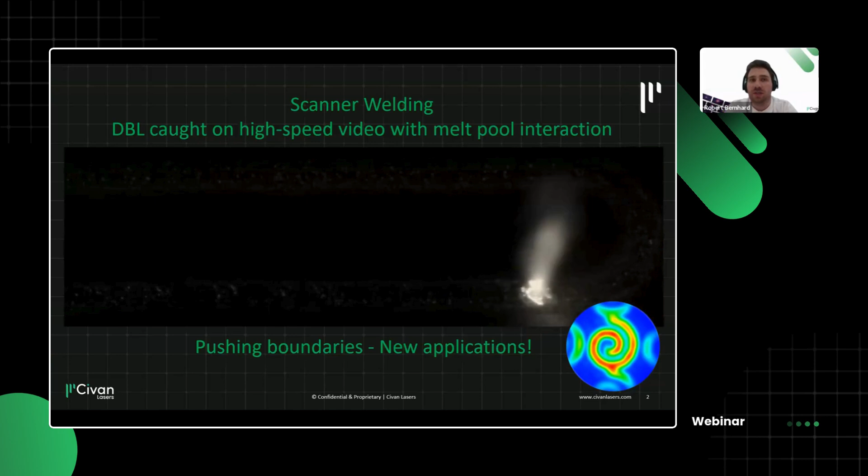The idea is we are pushing the boundaries of what's possible, meaning that we can now weld materials that are hard to weld or that we're not able to weld as of now using dynamic beam lasers. I just want to give an overview and some insights into what we are currently welding, and keep it open for discussion at the end about what else you can think of to weld.

Let's do a very basic technology fundamentals thing, because I think what you need to know about our lasers: if you buy one of our lasers, you get multiple lasers, and these do constructive and destructive interference, which means in the end you're getting multiple laser fibers that do interference patterns on the workpiece in the focus spot. This means at first we have really precise control of the beam caustic.

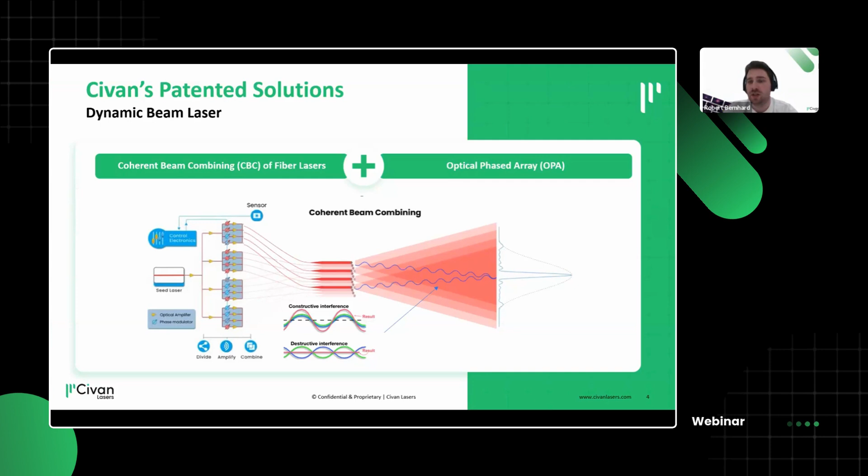But also, by using coherent beam combining and detuning some of these fibers, we are able to move this interference pattern around. This is key in order to be able to do high-speed modulation of the laser and then also of the beam shaping. So we are talking about dynamic beam shaping inside the focal area of our laser.

So this is nothing mechanical - it's purely electro-optic, and this means it's fast. Fast here, we are talking about megahertz of phase shifting, which results in frequencies above 1 megahertz where we can move around shapes.

We see that workpieces and metals, especially in welding, can really react to these different frequencies and the refresh rate of these shapes. If you think about it, when we go for conventional scanner welding, the upper limit is somewhat around 2 kilohertz. This is where we just start, and we would say this is something dynamic, where the process - the keyhole - follows the laser beam.

If we go higher in frequency, we go through a resonant regime, which is also really important for the process, because this is where we are able to get rid of impurities during the welding. This is something highly important to the welding in terms of frequencies. For aluminium and steel, these are usually 10 to almost 100 kilohertz, I would say.

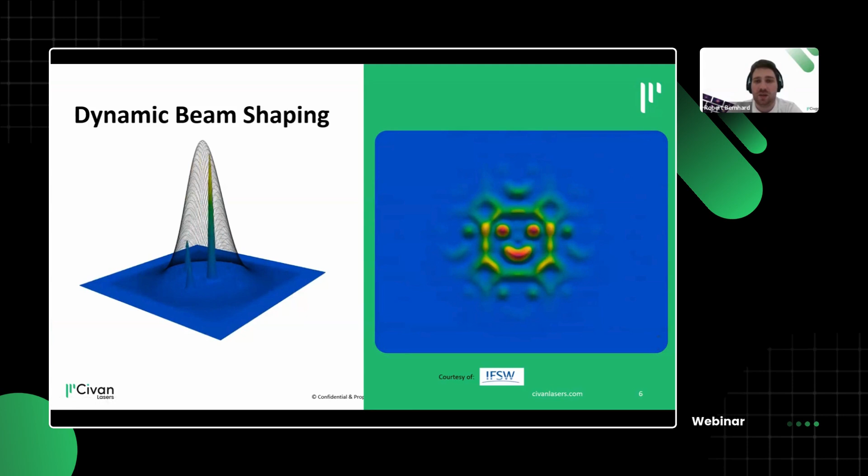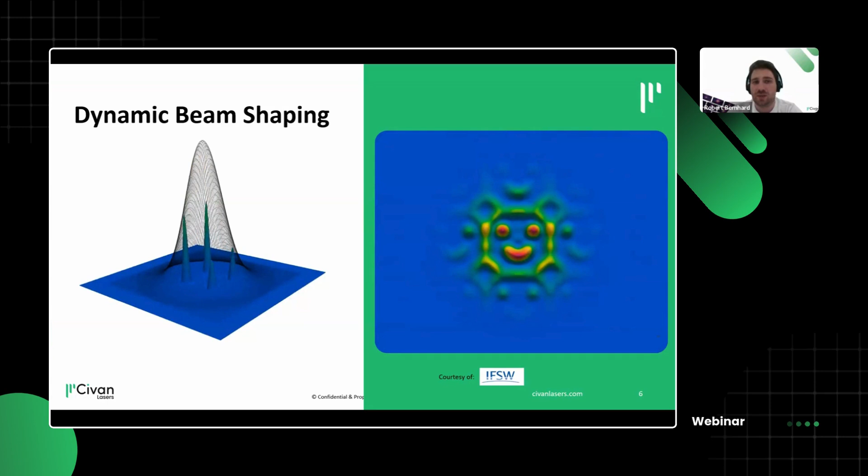This leads to megahertz speed of shape generation. In some fraction of a second, or even nanoseconds, we can trace out all the dots that make up an interference pattern, like this nice smiley here. So this is over time, but it's very important to know that the beam shaping itself is very dynamic, and we can control that dynamic aspect and tailor it to our process.

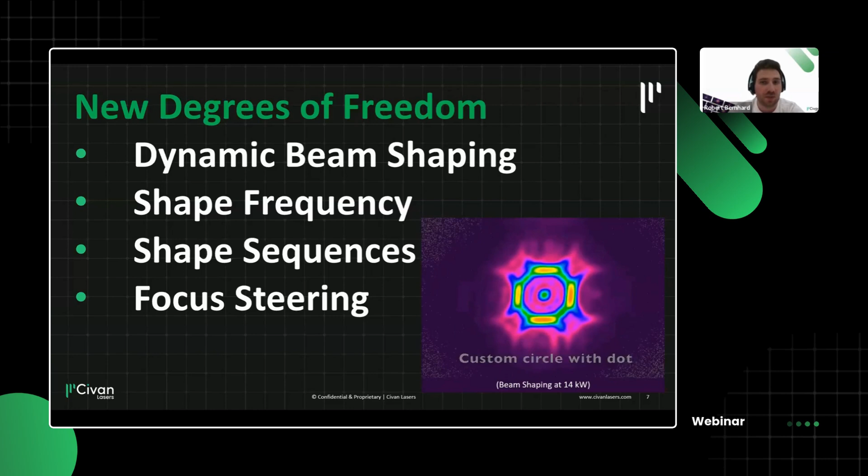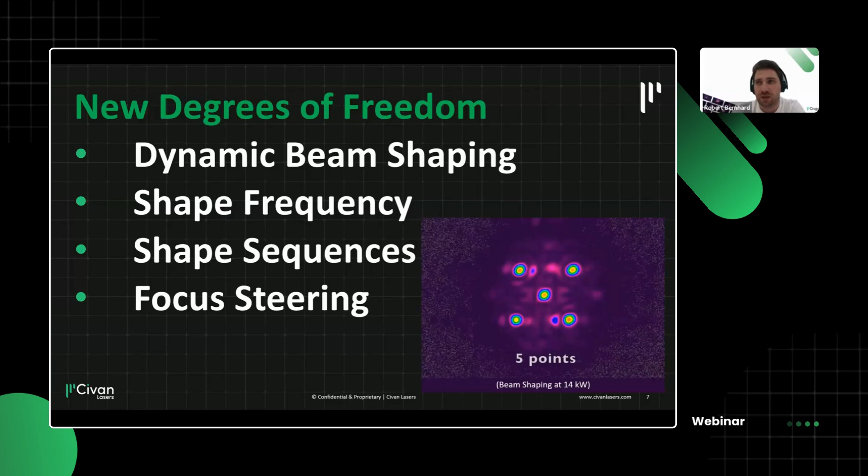By doing this, we have new degrees of freedom starting with the shape itself. We can design shapes, program them simply, but then we also have more parameters, like shape frequency and shape sequences, where different shapes follow one after another that can influence flow situations in melt pools and so on. And finally, this also enables, by clever focus or frequency shape shifting, a kind of focus steering, having an electro-optical Z-axis. These are the most important new degrees of freedom, and we put them into action.

Sequences can consist of 28 shapes each. As a starting point, I have a few combinations known for good parameters when we want deep penetration. We have something in our recipe book that works by having a confined beam, but then also some widening of the melt pool and so on. This works for many things, and it's really intuitive - I want a wider beam shape, but I still need some concentrated preheating, post-heating inside that laser beam. You can quickly get different kinds of sequences clicked together, and you're good to go.

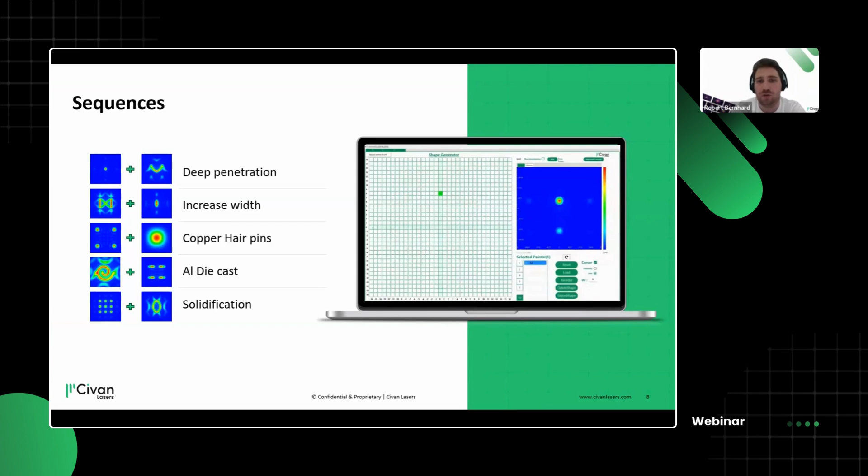This also leads to our programmable beam shaping, giving us the capability of rotating the beam shape without rotating our head. You may have seen it at the beginning in the intro video, but here on the right side it's more schematic and easier to understand - without turning the laser head, we can actually rotate a beam shape that here is 2 dots.

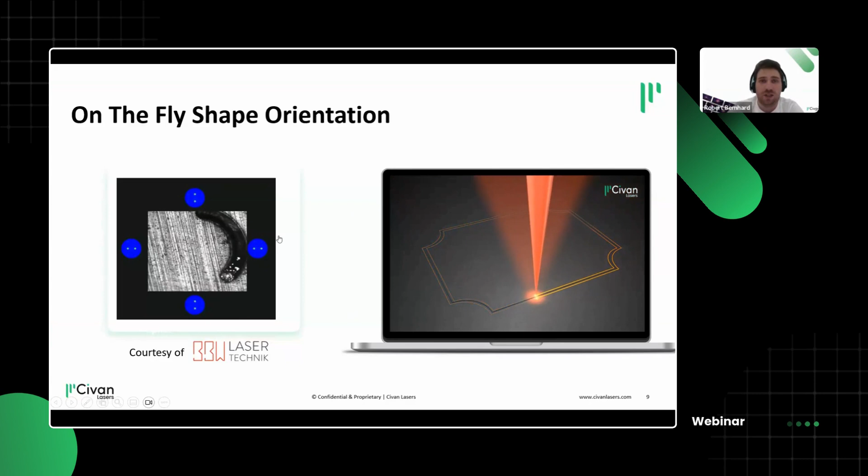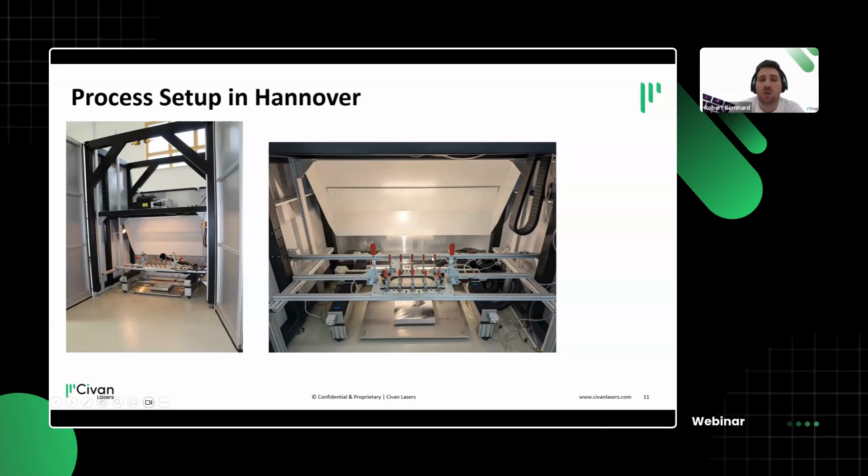Let's dive right into it. We've made some good progress with aluminum battery coolers in Hannover. Just to give you a feeling of what we're working with there, it's a really flexible setup where we have the laser head with the scanner up here, doing quite some remote welding. Down here your jig can be, in this case, a simple demonstrator jig for welding these cooler plates. You can see me putting one in here and then welding them remotely at high speeds.

The key aspect here - and I think I forgot to mention it - is that welding these coolers, which in e-mobility are usually big parts, 2 meters by 1.5 meters or so, with a lot of weld seam length on them. The challenge is to weld them leak-tight, but also really, really fast. Welding them fast is, of course, a challenge due to the material, in terms of getting the energy where we need it, as well as getting it crack-free.

When we're talking about high-speed welding, my definition here is 30 meters per minute, so 500 millimeters per second, and that's our target welding speed we wanted to achieve. As a starting point, we wanted to go with just a single dot, to make it somewhat comparable. But to spoil it a little bit, the single dot is no way of getting this welding done correctly.

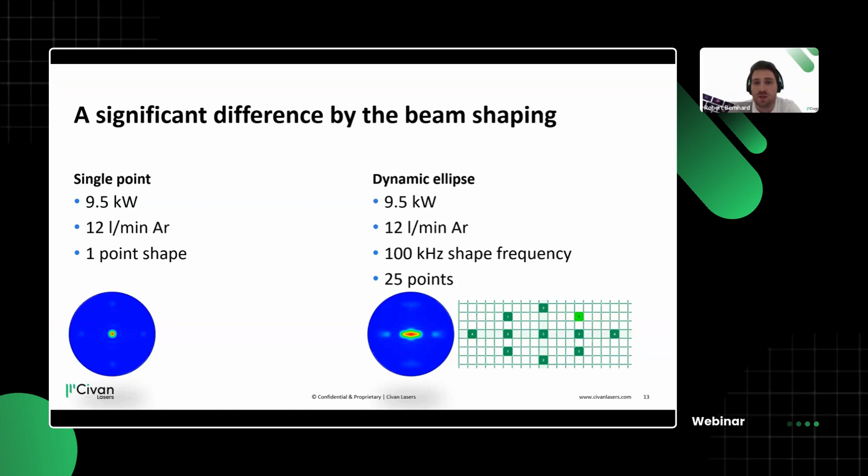So what we developed is a dynamic ellipse that has 100 kilohertz of shape refresh frequency and consists of 25 individual points. You can see how this is made up here in our program on the bottom, and it's important that our welding is aligned orthogonally to this line, so the leading edge is on top, and this makes for an especially wide weld seam. And of course, using the scanner rotates, like we saw with the 2 dots, it also rotates this ellipse electro-optically.

This means, like we were talking about, this is really, really fast. You can see the video speeding up. It's 100 kilohertz, so I can't show you, but what the workpiece here experiences is 100 kilohertz shape refresh frequency. That means every single dot is only on for 400 nanoseconds, and this enables us to get the stirring inside the material and open up the keyhole capillary, as well as getting the process on point in terms of still doing high speeds, but getting the solidification right and getting rid of cracks.

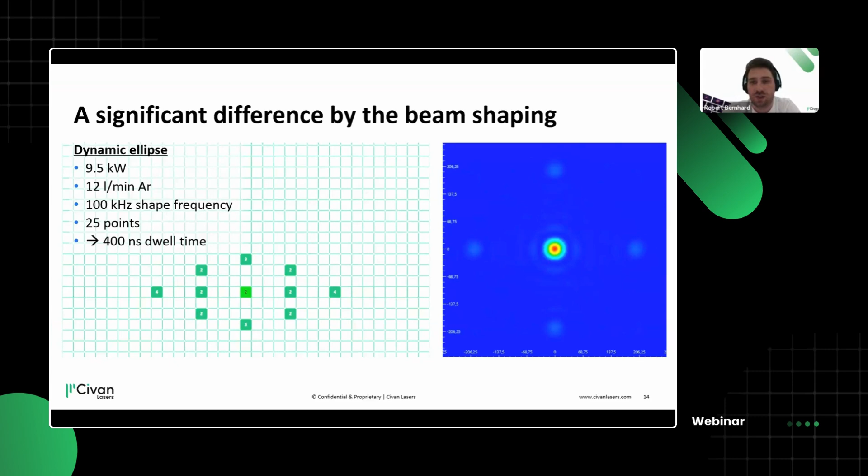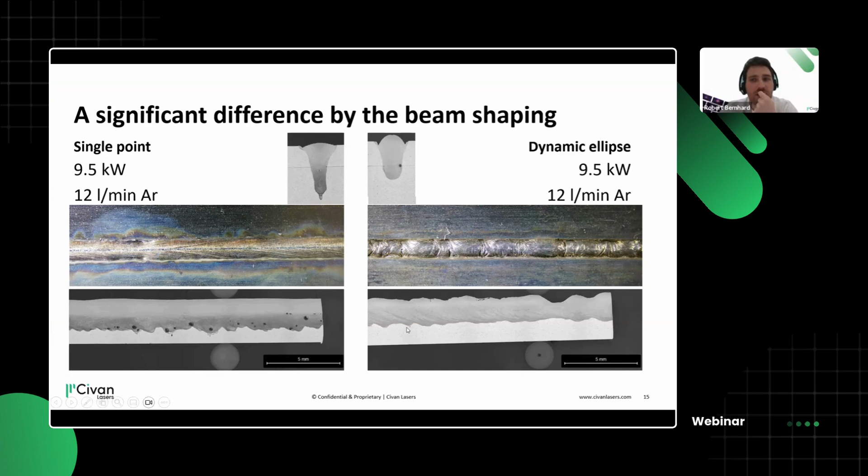What I mean by this, by using a single dot, we have, of course, deeper penetration. This is something we understand. But at the same time, we get a lot of imperfections. Looking at the cross section here, at these high speeds, we are still experiencing some fume issues, but no cracks, without any inclusions. So we are really happy that we can achieve these high speeds by doing this laser welding.

You can even see it here, I think better on other aluminium, where we can achieve also at a little lower feed rate, but getting very wide weld seams. So dynamic beam shaping here as well helps us get the weld seam tailored to our needs.

Talking about this cooler in specific, we are using this demonstrator here because it's a non-NDA one. We can openly talk about it.

So it's a dynamic ellipse, 500 millimeters per second. The top plate is 1 millimeter thick, the bottom plate is 2 millimeters thick. And we are able to achieve with this design leak tightness. We specified it as 2 bars, but I've seen the coolers bursting at 6 or 7. And then it's usually due to the design because we have inflation of these size.

There's, of course, some challenges to overcome at these high speeds. And I would argue that we can even widen the process window to get rid of undercuts. But in general, it's really important for us to have the leak tightness, and this is what we are able to achieve with this parameter set. I'm of the opinion that we can also do outside construction or structural welds as well, but the leak tightness here, the long welds we need, we are able to achieve at 500 millimeters per second.

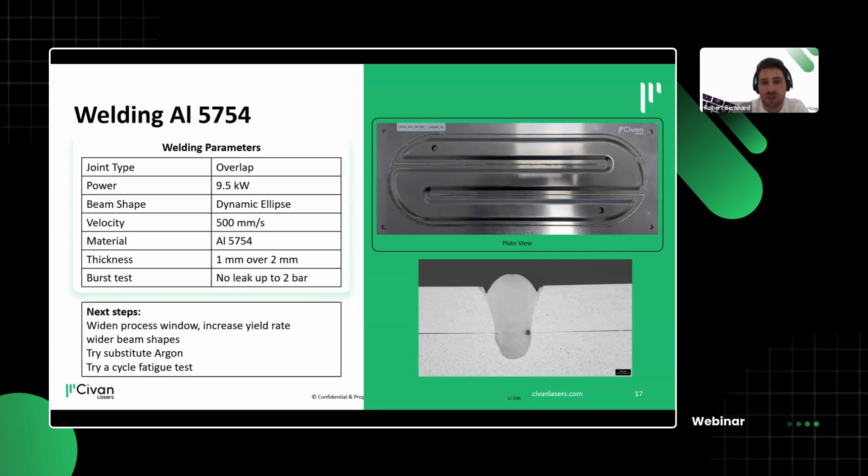Something I also like to show a lot is the difference between, or when you start to measure your laser process, there's pretty nice tech out there. In this case, we used a 4D sensor, but also the Precitec LWM works well. We've proven it, and the Plasmo process observer is also a very good option.

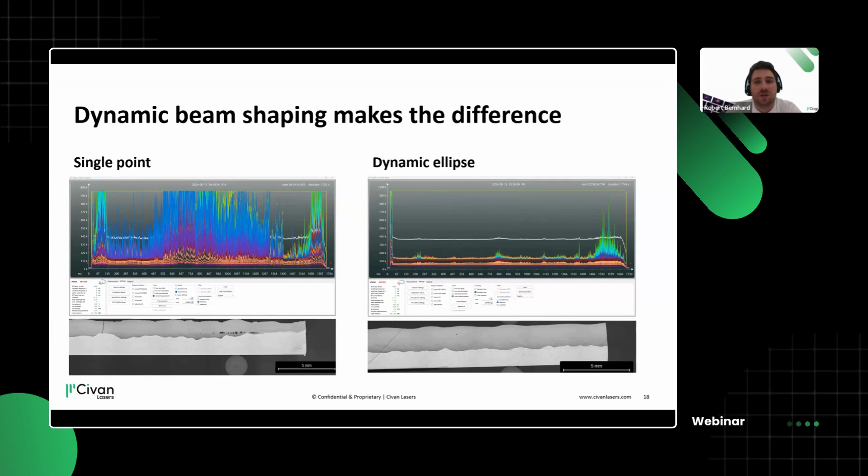What I find interesting is that, again, talking single point versus our dynamic ellipse, we get a lot of cracks during the welding, but also what we get is a lot of back scattering, which we attribute to the keyhole collapse that we can see during the welding. So the signal you see here is back reflection in different wavelengths from the process zone itself. And if we switch to our developed dynamic ellipse, it almost becomes good. This is something manageable where in series production we can specify a threshold and just see that this is a very stable and good process, I would argue.

So to underline this, for our Civan coolers demonstrator, we have this dynamic ellipse that has less penetration width or depth. The width is wider.

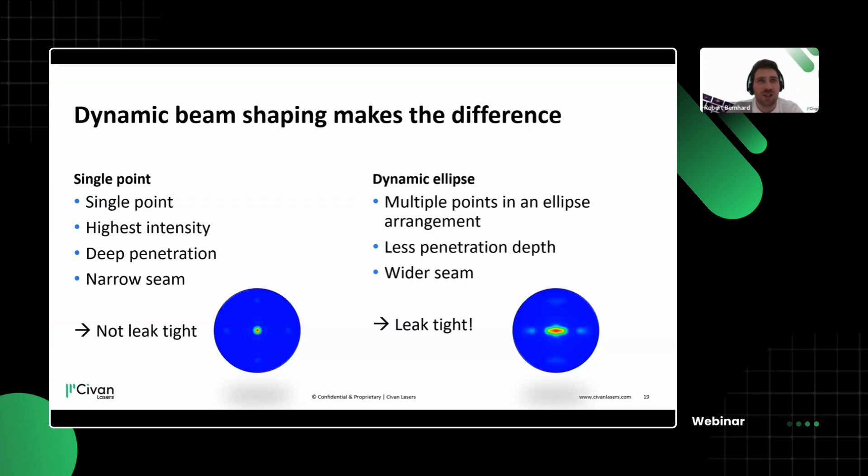And we get with this dynamic beam shape, following the path of the weld, leak tight coolers at 500 millimeters per second. This is something we weren't able to achieve before, and I think no one else was able to achieve this high speed without cracking, in other typical Gaussian configurations. This is also a nice thing about the scanner, where the process speed is not limited by any axis, and this is something we can do with our laser as well.

Stepping back a little from aluminium, but in the scope of e-mobility we are talking about, I think it's a must to mention copper. You already see the first results here with copper welding in terms of bus bar applications, talking about the welding of hairpins.

This is, I think, something where there's a lot of ideas using different wavelengths, blue and green. That is a decent approach, but I think nothing beats the high quality of our welding in infrared, high power, perfect beam quality, and stable keyhole.

And now by introducing dynamic sequencing, this means we can do fun things like melting the copper hairpin by placing 4 individual dots alongside, or even a line on each of these hairpins, and then switching to something more random. This means we have something steering and connecting them, so you get really this pearl being generated.

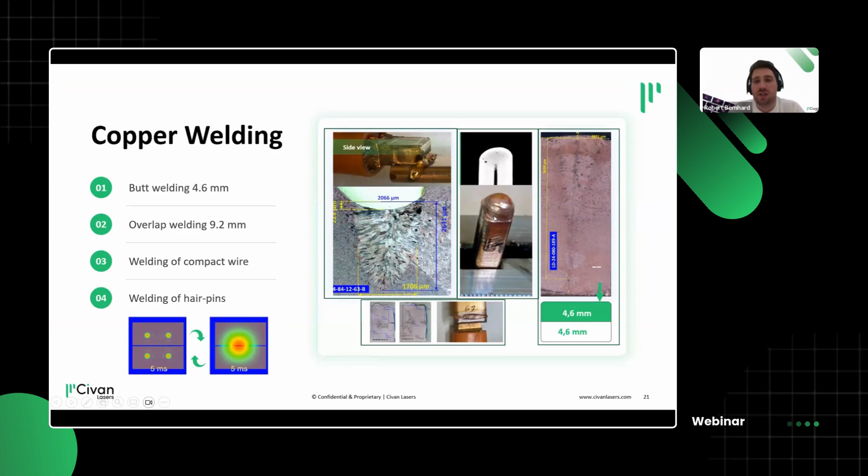So we see also in copper, I think this is something I published for the Lane conference just last year. Doing beam shaping allows you to get very good penetration, get rid of spatter, as well as making sure that the weld seam itself has the right dimensions.

How do we do that? For copper, we need high intensity to just get the process started. This is something we can do very well by doing constructive interference in a single point. So this is an interference point. You see it's really small, condensed, around 85 microns in diameter.

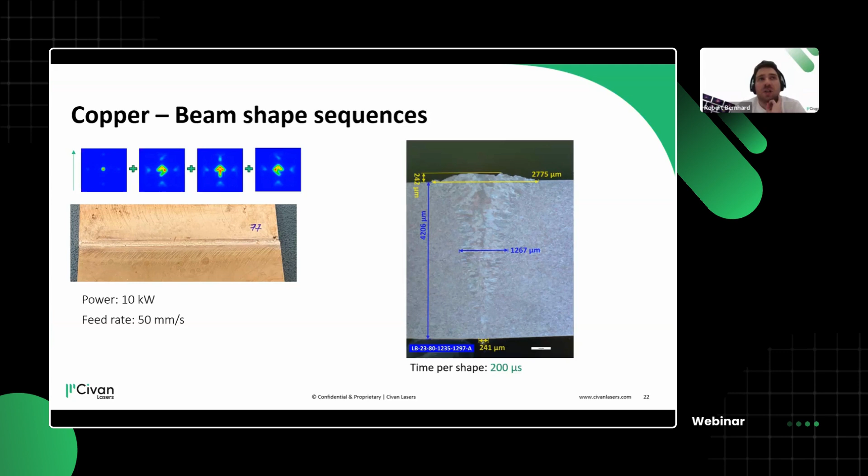But then I switch every 200 microseconds to a different shape, it's kind of an arrow shape, but with a stir bar at the end. That's the idea. So top again is the leading edge, and by welding this way, the high speed also shows that we are keeping the keyhole open for longer. We are avoiding collapses, and by distributing the heat, we also get around overheating the material itself. So there's no spatter, no melt pool explosions happening.

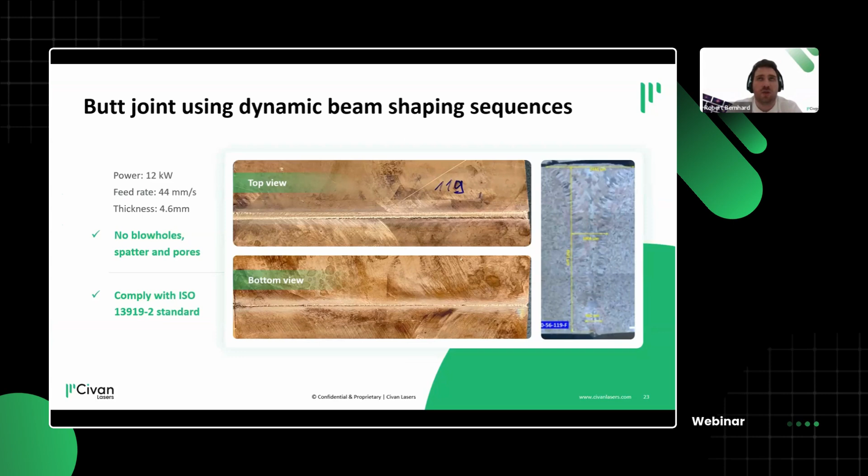Well, and this finally leads to things like busbar welding, laser welding of around 5 millimeters material thickness without blowholes and spatters. So I think this is also a very interesting application where with our laser you can do copper welding and even advance and enhance on typical static ring core things, and you don't even need to bother with blue and green then.

Building on the copper thing, now we were also talking about aluminum before, but one can easily imagine how the steering and the beam shaping definitely also must have an influence on intermetallic mixing. And intermetallic mixing here we mean, or we show it by using aluminum on copper. By doing this and then changing the frequency of the shape drawing, in this case a spiral, we see that there's an influence on how well materials get mixed.

And copper and aluminum, they don't like each other, so you get a lot of brittle phases. But if you can steer it up and get it less concentrated, I think this is something we can show here, it's possibly also an enabler for these intermetallic mixing and intermetallic weldings, at least.

This would also be true with a different parameter set for coated materials, where you might want to take aluminum silicon coated steel plates, and dilute the material into the base material, so you get rid of it without needing to vaporize it. So then there's a way of saving process steps at the same time.

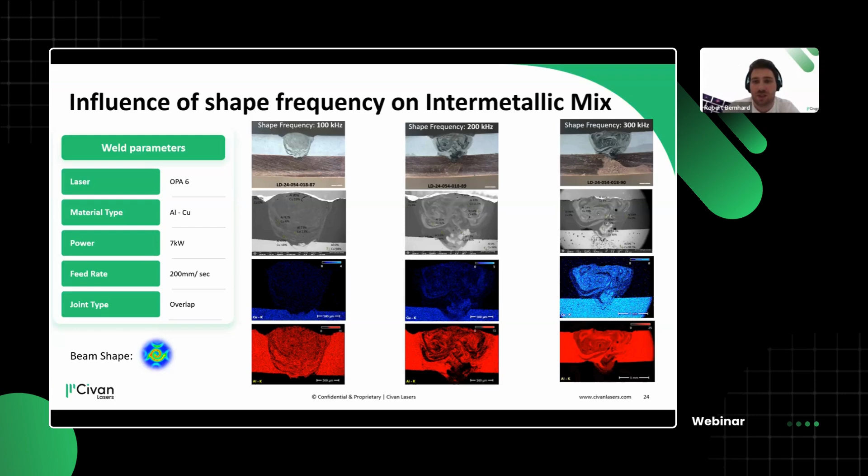Building on this, another very nice application and results we want to show is the welding of aluminum die cast. The idea is to replace processes like friction stir welding, but also to replace long process chains where you have to mill your part and make perfect adjustments, when you can just use laser welding.

This works on raw, as-cast, ejected aluminum die cast parts, so not much machining is needed. What we see here are very nice cross sections. Of course there's some porosity, but it's highly reduced compared to what you'd usually get with laser welding. We're able to achieve less than 3% porosity, while keeping the inside of the part intact.

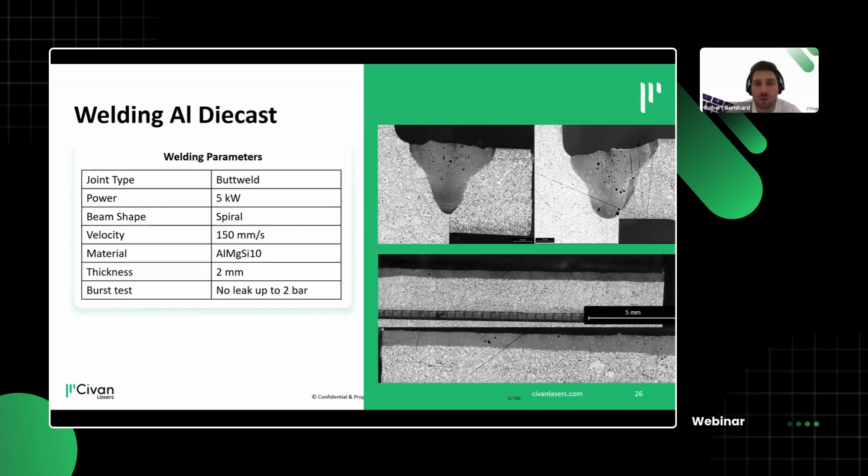So you can even weld this with electronics built in. Here we're talking about a thickness of 2 millimeters and more - the thickest material we welded was around 10 millimeters of aluminum die cast. Doing this with the laser's dynamic beam shaping, in the form of a dynamic spiral, gives us the opportunity to remove porosity out of the welds.

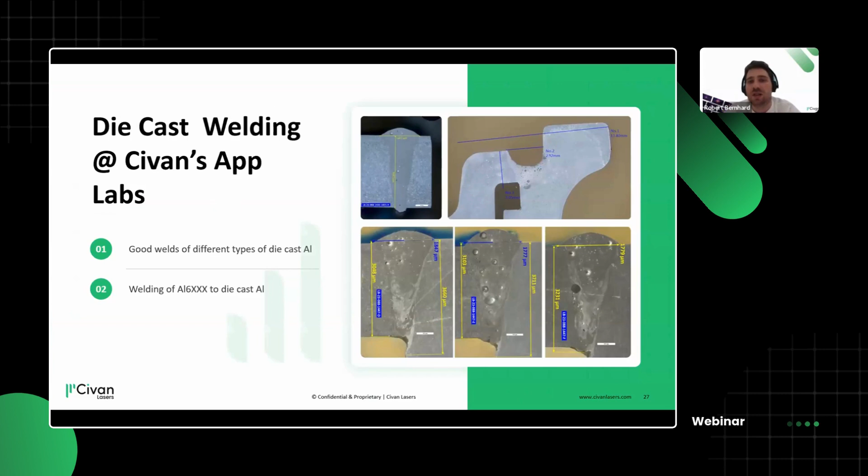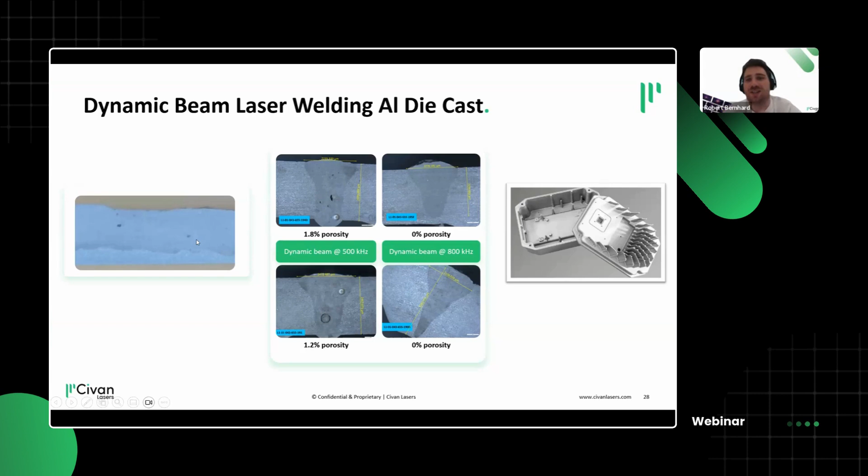You can also start playing with the dynamic beam shaping frequencies, but for die cast, it really depends on the die cast quality what you can achieve. Maybe 0% porosity is a stretch, because the base material has some porosity, but at the same time, there are ways of melting and degassing these materials simultaneously.

This is a good illustration of how our high frequency beam steering elongates the melt pool, makes sure the capillary stays open, and collects the porosity and bubbles from the side that occur during welding, as well as the ones already dissolved into the material.

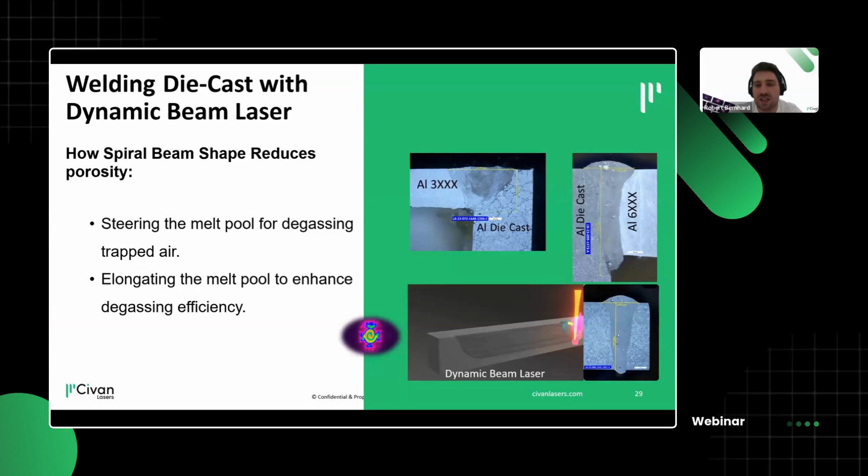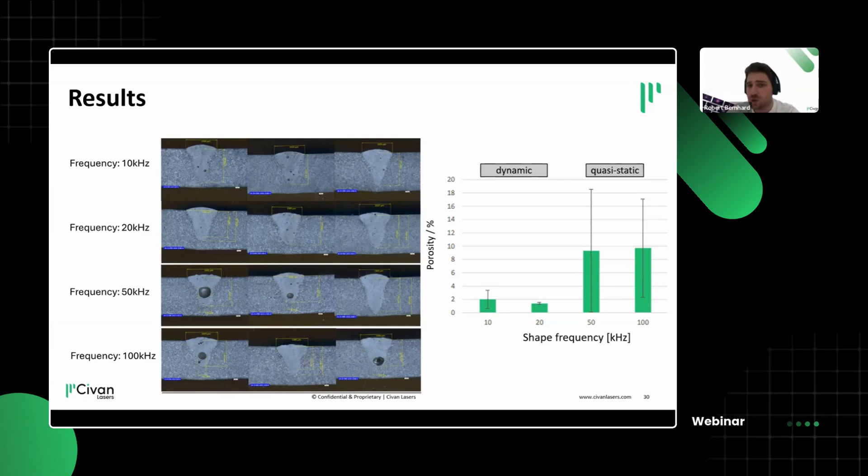Something we're really happy with in welding aluminum die cast: it's fast, it's hassle-free, and you don't even need argon for these. These are purely remote welding without any shield gas.

This sums it up really well. Compared to friction stir welding, we are way faster - our dynamic beam lasers achieve 9 meters per minute, if not even faster. I think this is a very good application, and in Hanover we're building our business, expanding in this direction, doing more and more laser welding.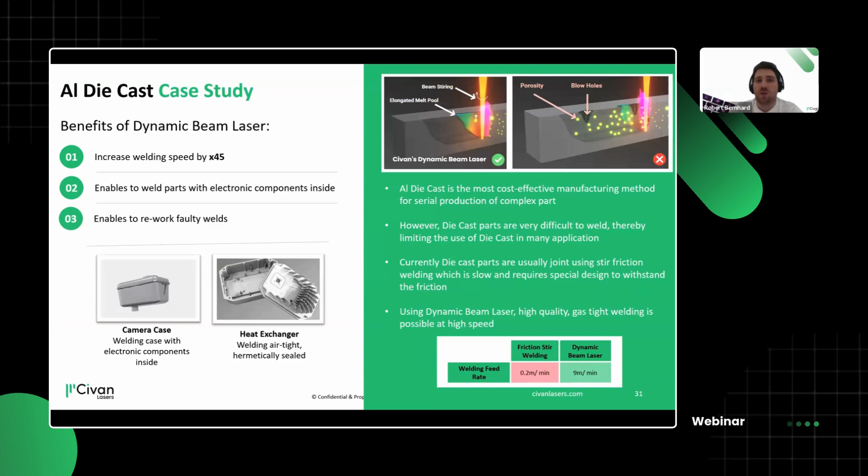Finally, and I hope you're still interested, is the topic of high-speed welding - welding steel. This is steel welding at 500 millimeters per second, which is pretty fast for a 1 millimeter overlap.

The challenge you usually get with this high-speed welding is that it gets worse, and you get bulging, where the molten material bulges or adheres together, and you get these bubbles or problematic zones.

What we found is that when you look at this video from left to right, we increased the shape frequency. The shape here was something like an infinity wobble pattern, and doing this wobble pattern at frequencies of 30 to 100 kilohertz is way faster than any mechanical scanner can do.

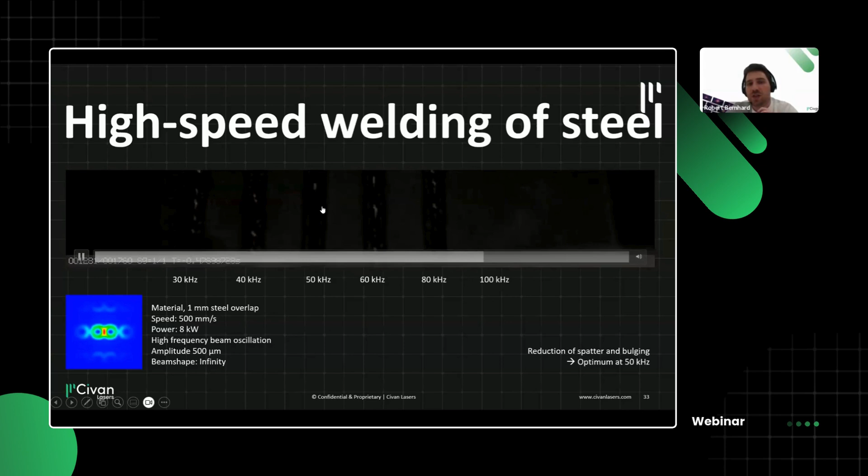You see that you start with a lot of spatter at high speed, but then you finally end up at a sweet spot of 50 kilohertz where there's no bulging, almost no spatter, and then the bulging at higher frequencies comes back.

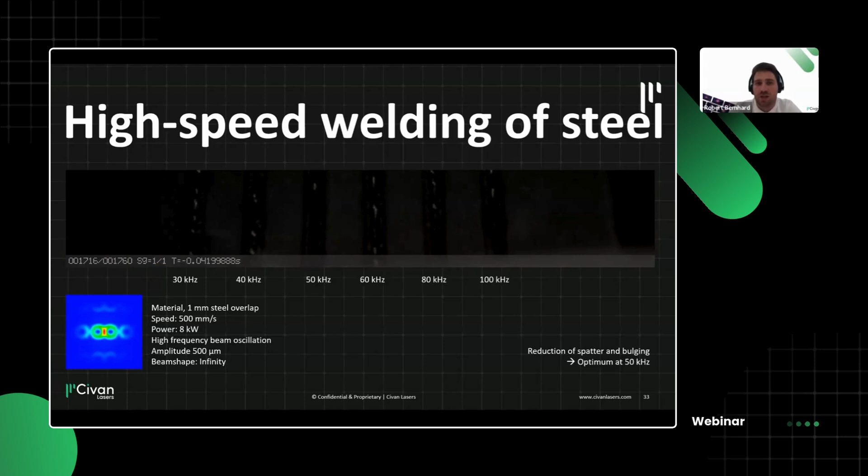This is really interesting in terms of how laser parameters can affect your process. If you think about something that doesn't work for you yet - high speed welding where you get a lot of spatter and problems - maybe dynamic beam shaping can target exactly this problem and enable welding at speeds where otherwise another laser couldn't work.

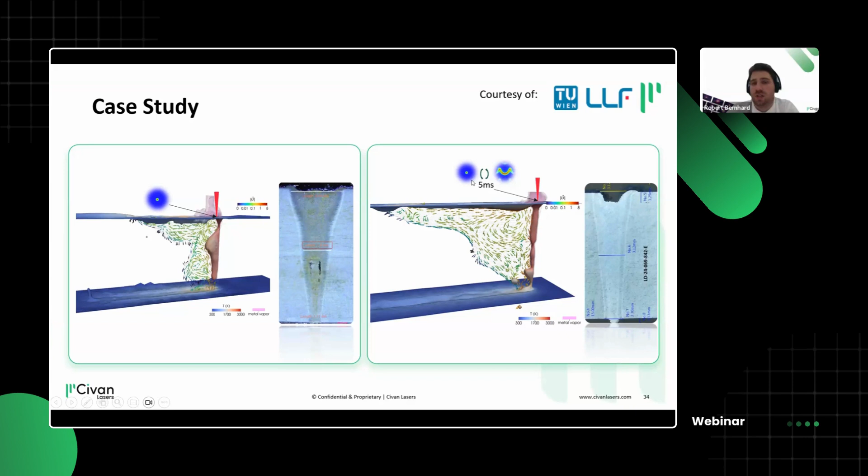I would argue in the end, most of this is a solidification problem in terms of thermal gradients. This is something we can adjust by changing the flow and the energy input, how it goes into the weld seam. And suddenly your welded steel can become good when you start your way with dynamic beam shaping.

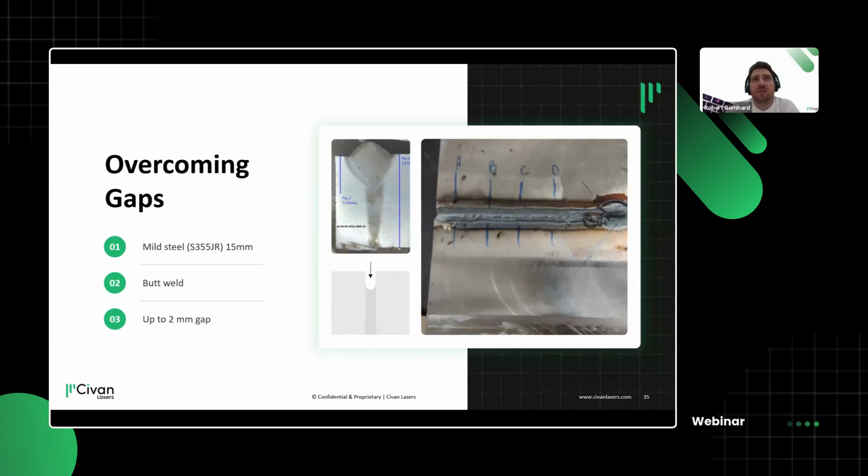This also goes for welding over gaps. This is something, but then usually you have to start with the filler wire. This is work in progress.

This here, I think, is something where we can do welding even thicker structural steels, mild steels, which also, of course, play a role in automotive stiffness as well.

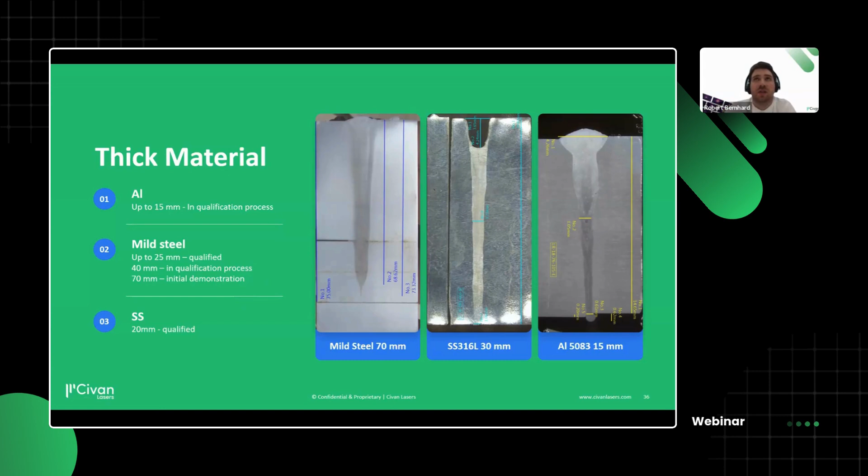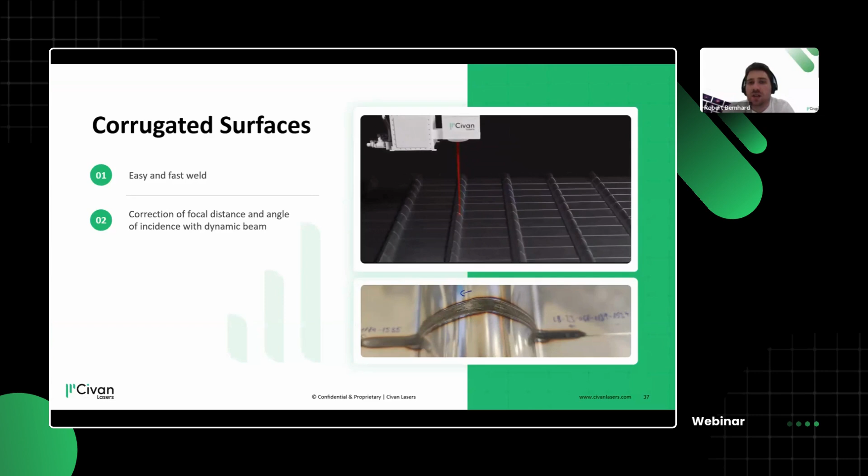Maybe also a fun thing, but this is quick welds using a scanner going over more complex 3D surfaces. This is just a way to show that our laser can do electro-optic focus shift and motion on the fly, which the scanner and axis system we have is prepared for. We can also do that.

I hope I gave some kind of overview of what we can do, especially for these e-mobility tasks. Maybe it caught you in, maybe you have an idea also for your application.

What I would like to emphasize is that with our dynamic beam laser, we have the capability of controlling the thermal distribution in our weld seam. This is backed by high-speed cameras, cross sections, and simulations. But at the same time, the molten flow is really, really important to manage for all kinds of materials.

This is valid for copper. This is valid for aluminium. And doing this dynamic beam shaping finally results in stabilizing keyhole and weld pool geometries.

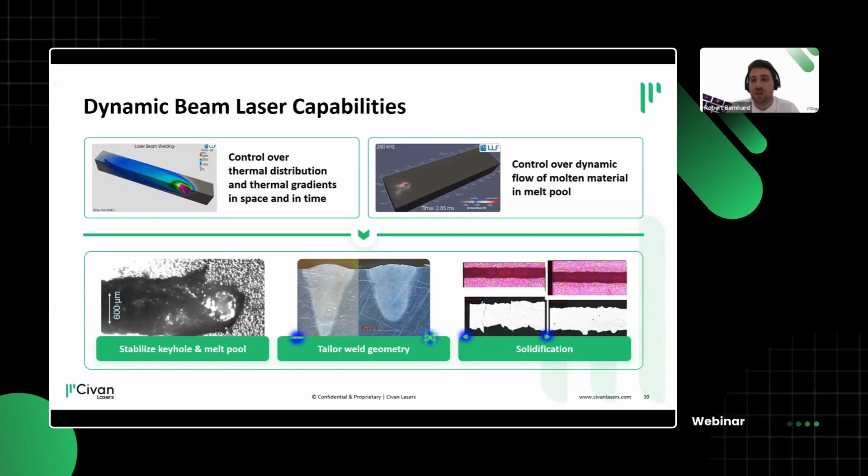We can, as we've seen, tailor weld geometries in order to meet requirements, make them stronger, make them wider, as well as doing adjustments in solidification rate and going through the material, making sure that maybe even the material composition in the end metallographically can be adjusted. But this is something I would argue we can try together.

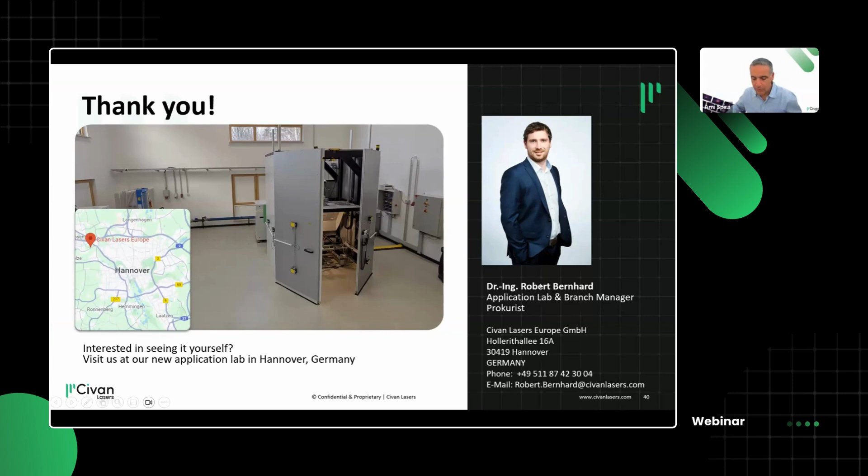And now I'm excited to also answer questions. Thank you very much, Robert. And now we switch to your questions. We have a few questions from our audience here.

Using a spiral pattern on cast aluminum, how much penetration can be achieved with 2 kilowatt or 6 kilowatt laser? I'll just mention that we have multiple laser powers that we can achieve, from 6-7 kilowatts up to 100 kilowatts. What is the resultant porosity like? Do you still have the balance of porosity formation with penetration and weld speed? So wow, three questions at the same time.

So penetration-wise, ballpark numbers speaking, with 2 kilowatt laser power you usually do a 50 millimeters per second speed. I would argue that 2 to 3 millimeters penetration can be achieved. This, of course, then depends on the speed and other things. At 6 kilowatt, you can already weld 5 to 6 millimeters. That's, of course, a balance.

And I think on the second question, we are really good on the porosity. So there's, of course, some process development to be done, especially if your die cast material is difficult — there are different qualities among die cast materials.